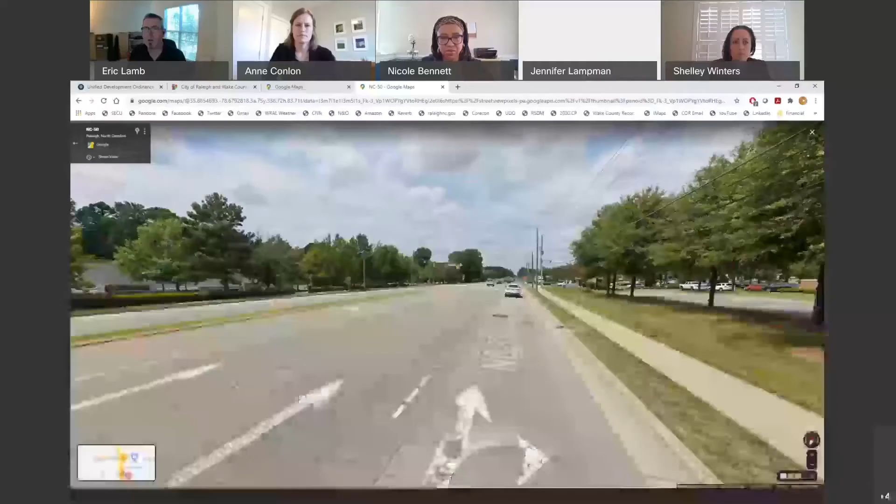Good deal. So we'll start with the Unified Development Ordinance, because that is really, from our standpoint, the basis from which all standards flow. And as we've developed this, when we look at modality, we're concerned with 4 primary things. 1 is vehicular flow for general purpose vehicles, 2 is pedestrians, 3 is bicycles, and 4 is transit.

I'm going to apologize. My canine assistant would like to come join the call, so we'll let her do that. Otherwise, she'll whine and distract. I may have another one that comes and joins me and is not as friendly. So,

we have all of our street sections outlined in the UDO, and in each you can see how different modes are incorporated into streets. So, I started here on the Avenue 4-lane divided, primarily because this is the most common, I think, that we see for major streets and development along major streets. And our standards for this, basically, a full 4-lane section, conventional bike lanes on the outside, a planted verge with street trees, and then sidewalks.

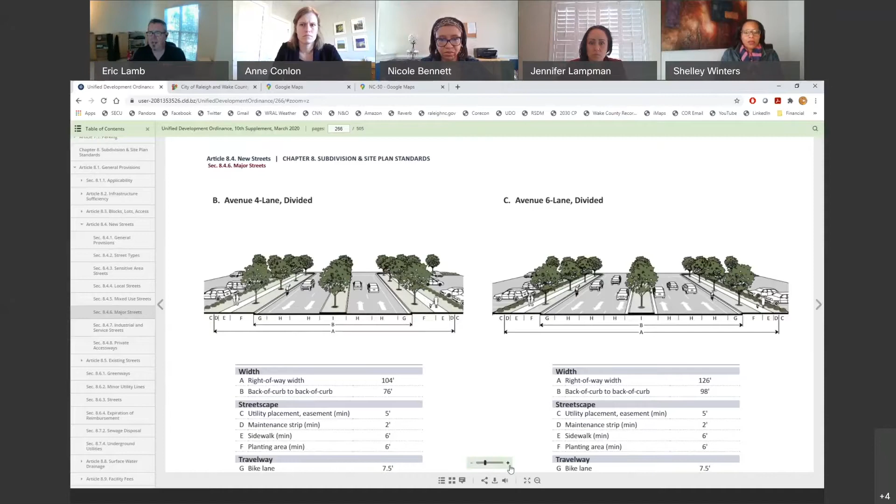And one of the things you may hear reference to, as we look at what this standard design looks like, we do sometimes run into issues with the North Carolina Department of Transportation. And it gets into this notion of what they refer to as clear zones. And NCDOT, for the most part, still utilizes an old school approach to clear zones and recovery, in many ways treating major roads almost like highways.

Our standards allow for the planting of street trees. We like that on multiple fronts, both from an aesthetic standpoint and the creation of a better space between the travel lanes and the pedestrian realm that make for a more enjoyable pedestrian space. But at the current time, we have to follow the state standards. We do have some latitude when there's bike lanes in place and certain types of trees are used, and we try and exercise that when we can.

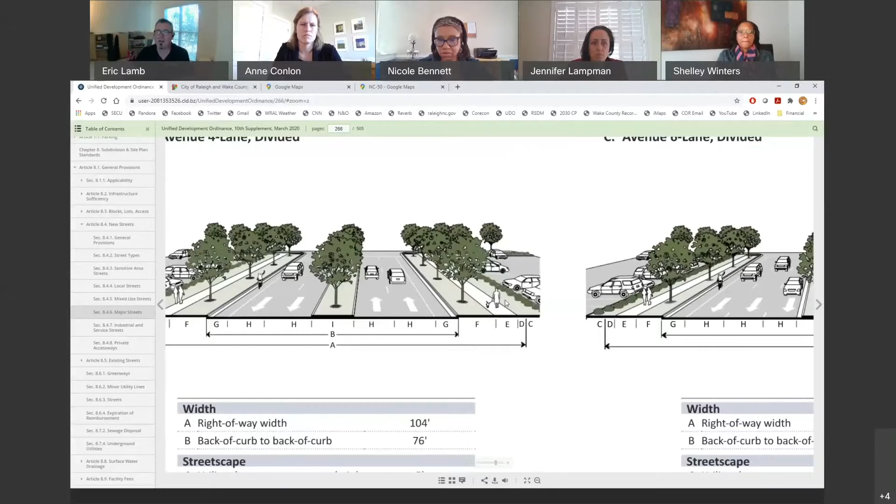But otherwise, DOT requires the street trees to be located behind the sidewalks in those cases, and we work that out on a case-by-case basis. But primarily, this is the fundamental starting point. There's different types of cross sections that we've got in the city code in the UDO.

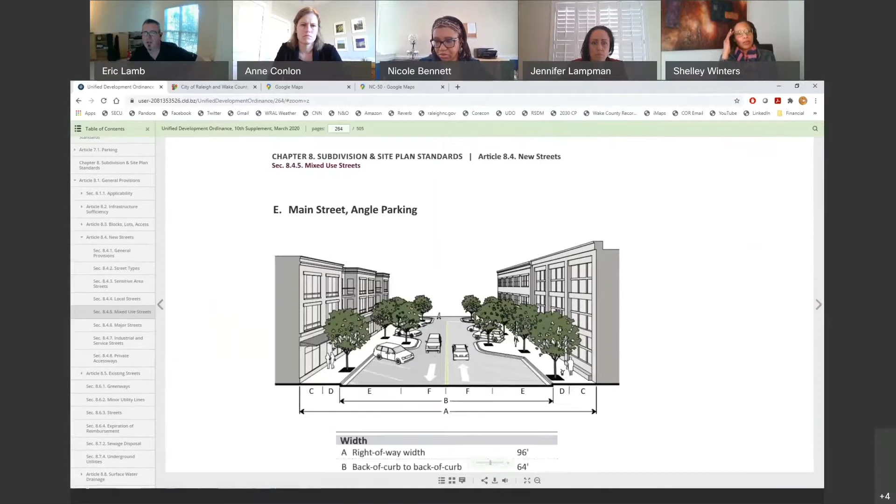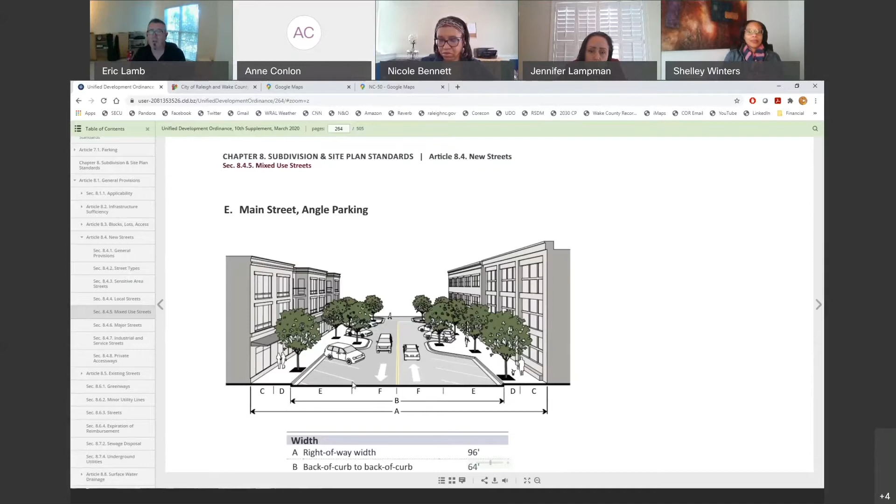In this case, for example, you'll notice with the main street that there is no specific bicycle infrastructure associated with this type of design. And the implication here is that a main street scenario is meant to be such a low speed, low volume environment with the interaction of the on-street parking that bicycles would move comfortably within that shared space with the cars. There's some debate on whether or not that is the right approach long term, but that's where we're at today currently with that standard.

We've got other standards for avenue 3-lane parallel parking. This is similar, for example, to what we're installing in the Cameron Village area. But we're starting to see now more migration based on newer design standards that would flip the location of the bike lane with the parked cars. Some folks like to call that a protected bike lane. Others call it a separated bike lane. But we're seeing that start to become of greater interest.

There's some trade-offs that go along with that. One of the upsides is that it makes for a narrower street footprint from edge to edge here, so that the friction of the on-street parking is happening closer to the travel lanes. And the thought there is that helps keep the speed on these streets down. One of the challenges is it puts the bikes over against the curb, and at intersections, you have to be careful to daylight those intersections, because otherwise the parked cars will hide cyclists from drivers on the main line, and that can create issues at intersections.

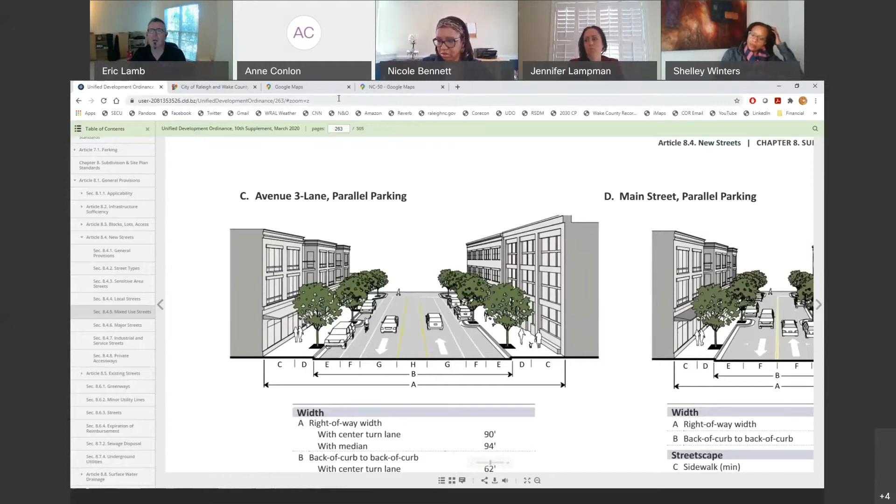So the bottom line here is that the UDO controls the standards for the nature of our frontage improvements, and how we apply those to development plans. So let me pause here for a second and go out. So I think one of the things that's most fundamental about what we do with development plans, let me find a good example. I apologize, you're going on a virtual tour of the city with me here.

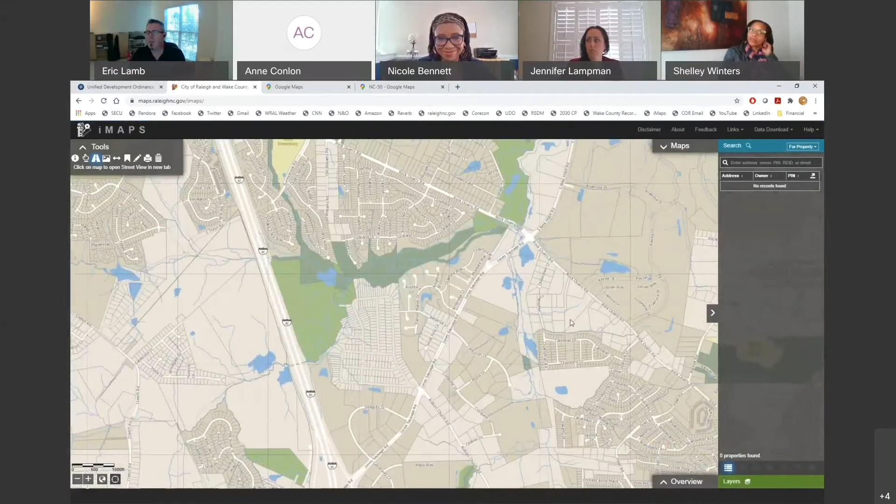So for example, as we have new development, we have the ability to require a couple different things. One is impacts to a site that are based on traffic impacts. So for example, you're generating the need for a new traffic signal, or you're generating the need for additional turn lanes. We have some ability to require developers to mitigate the nature of their impacts. The other thing that we have the ability to do is what are known as exactions. And that is where we can require, as part of the construction and development of a site, that the frontage is built out according to certain standards.

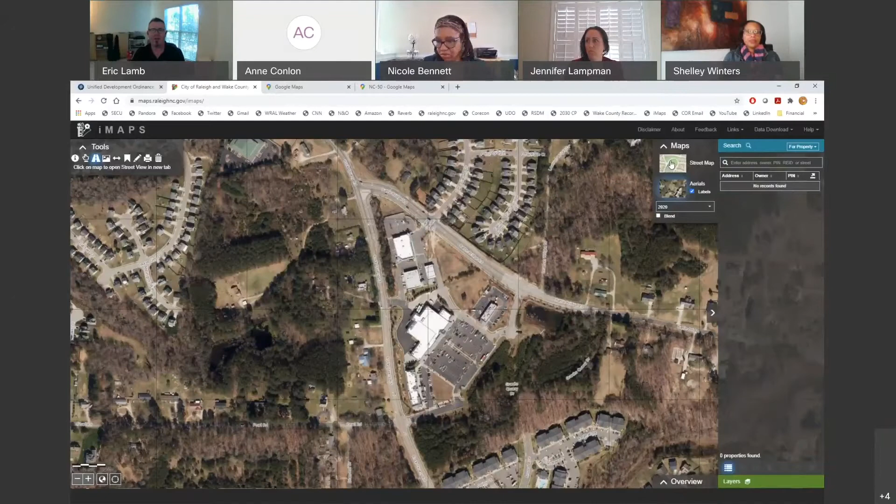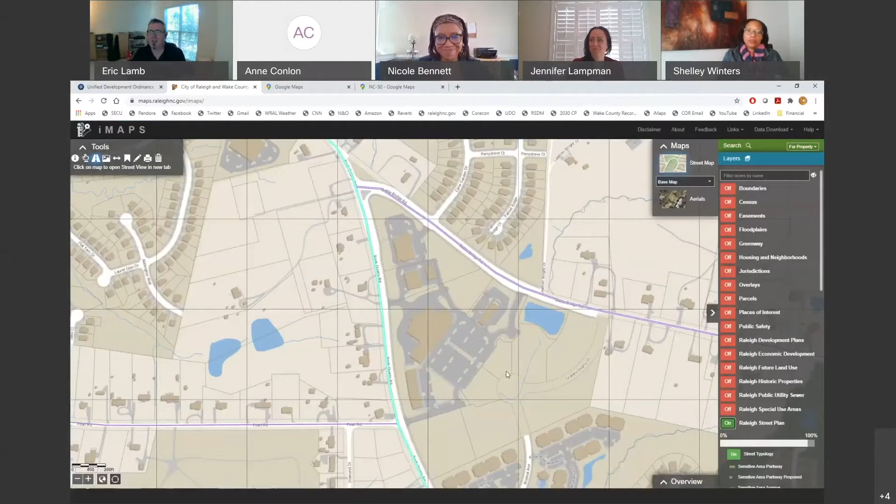Now, as I was showing you these cross sections before, we've got standards for each different type of classification. One thing that I'll point out is that we also have a street plan, and Raleigh is a fairly, I'll call it well planned city. Some may disagree, but it's very much a planned city in the regard that we've gone through the entire major street network and applied a classification and a standard for what each street needs to be based on the ultimate development of the city as proposed in the 2030 comprehensive plan. Because now it's 2021, 2030 is only 9 years away.

In reality, our forecasting, as we work with the regional metropolitan planning organizations, actually happens on more of a 30-year time frame. So looking at what the full build out and growth of not just Raleigh, but all of the member cities in the MPO would be, based on land use assumptions and what the yield would be and when that land develops. That gives us an idea to look at forecasts for what types of traffic volumes we could expect on some of these major corridors. And that starts to then inform us on how large these streets need to be. And so we've gone through and applied that to all the major streets in the city.

Everything that you see in the teal here are all classified as 4-lane divided avenues. There's a couple of categories. For example, if you see everything in the blue, those are designated as future 6-lane streets. The purple with a white stripe is a 2-lane divided, which could either be 2 travel lanes with a center median or 2 travel lanes with a center turn lane. It's effectively the same standard, and we apply that in specific contexts. And then the solid purple line is a 2-lane avenue, and that is 2 lanes of traffic with no separation between.

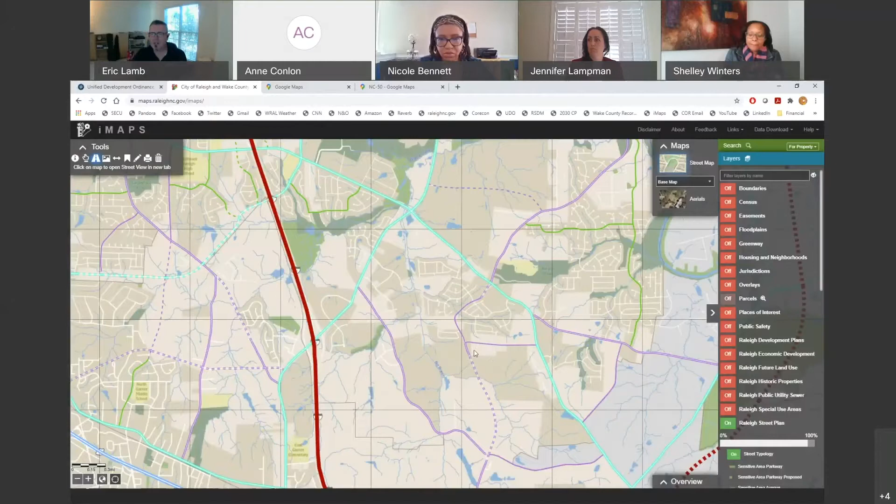And so as the site comes in to develop, one of the very first things that our development review staff does is consult the comp plan and see what is the classification of each street that these streets front along. And so this is a good example of a shopping center site that was done sort of on the edges of Southeast Raleigh. This is at the intersection of Rock Quarry Road and Battle Bridge Road.

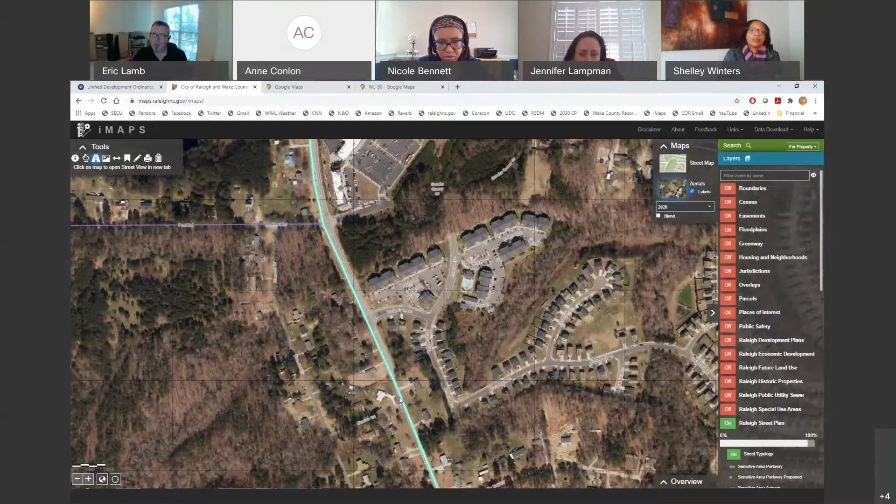So as this development came in, up until a previous point, this part of Rock Quarry Road was a 2-lane road. And so let's see if we can do this here and get a good view. And I'm going to back it up down here to this part. There we go. So as you can see, much of the area was developed originally as these 2-lane, farm to market roads. And that was the original backbone.

And in many cases, within the past 50 years, some of these streets haven't been paved roads that entire time. I can remember going to public meetings in North Raleigh and meeting people that talked about the fact that parts of Falls of Neuse Road were not paved in the 1970s, early 1970s, north of Millbrook Road. Some people can remember that.

But as we apply urban standards to urbanizing areas, that's why you see these areas with dead pavement where the road's been widened, the sidewalk's been built, but it's not being used for anything. Sometimes you'll see this space used as an interim turn lane, for example, and striped out. But in reality, we're requiring these developers to build out the entire cross-section of the street based on those adopted standards.

Now, in a case like this, that sort of looks like a bike lane, but we've not got it designated as one. But you can see how with the widening that's been done over here, again, the developer is required to build out per that cross-section along their frontage, and we're able to utilize that and create a center turn lane, improve some of the capacity and safety associated with a situation like this.

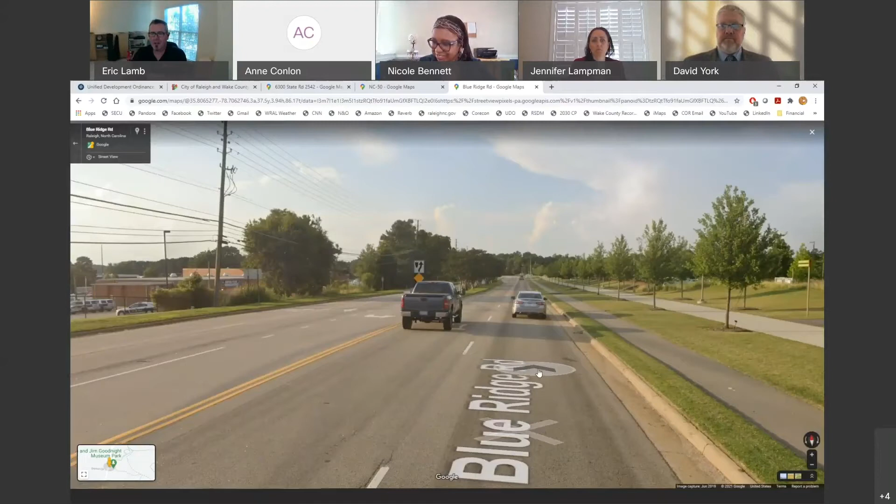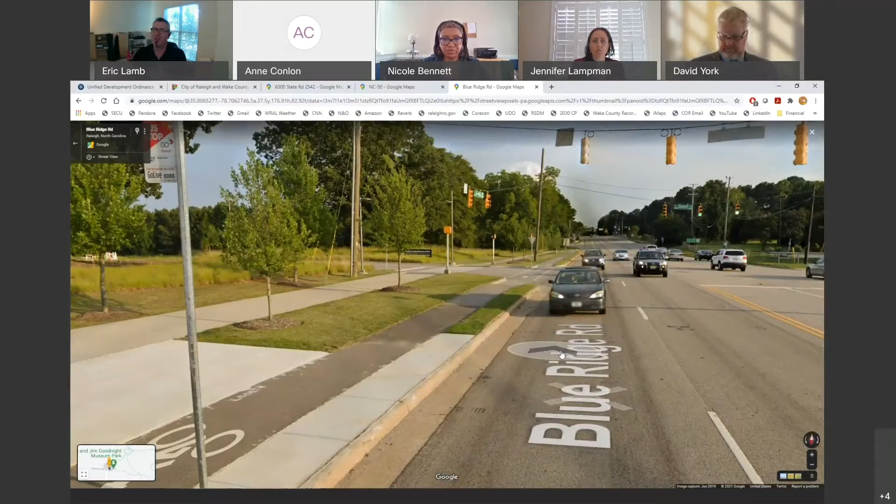Okay, so I guess the other issue has to do with that nature of off-site improvements and our ability to require developers to do that work off-site. What I was going to say was in situations where, let me find a good example. Let's pretend in this case this is a bike lane here, and we don't have that facility built behind the curb yet. There's some concern about, as we're exacting these frontage improvements from these developers, that we're not getting these back of curb facilities. And that's true on a single site basis.

The good news is we're still requiring developers to dedicate additional right of way. So at such time that we want to come back, we have the ability to move this curb line in and reset the curb line on the edge of the travel lane and build either a wider sidewalk or multi-use path behind the curb, or build a separated bike facility in this place. So that's the upside, is that we're still getting that dedication of public space that allows the city to come back at a later date and make that modification and make for a complete facility. One of the challenges sometimes is, stop sharing.

One of the challenges with our approach can be the piecemeal nature of those types of frontage improvements. You get a development here and they build all their section out. Then you got a gap that's still 2 lanes. Then developer here builds their section out. So you're still left with that in between section that either would get addressed with future private development or some type of public investment where the city comes in, or NCDOT, and finishes that widening. And that happens on a regular basis.

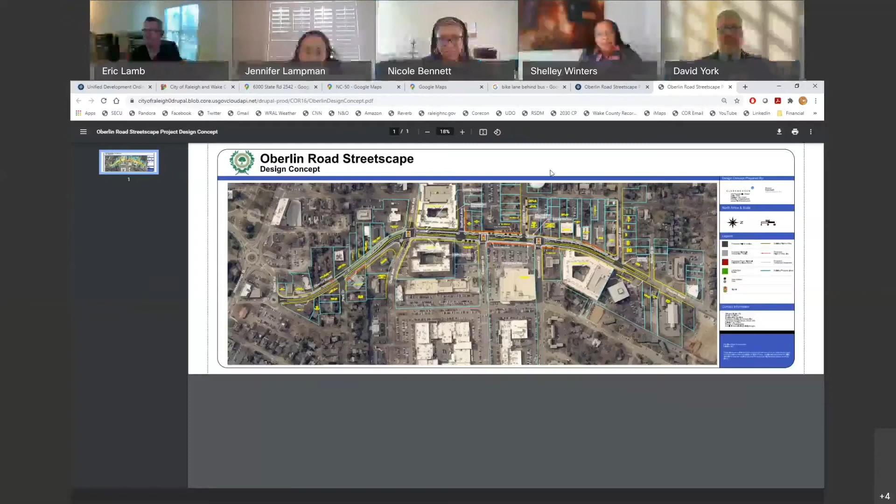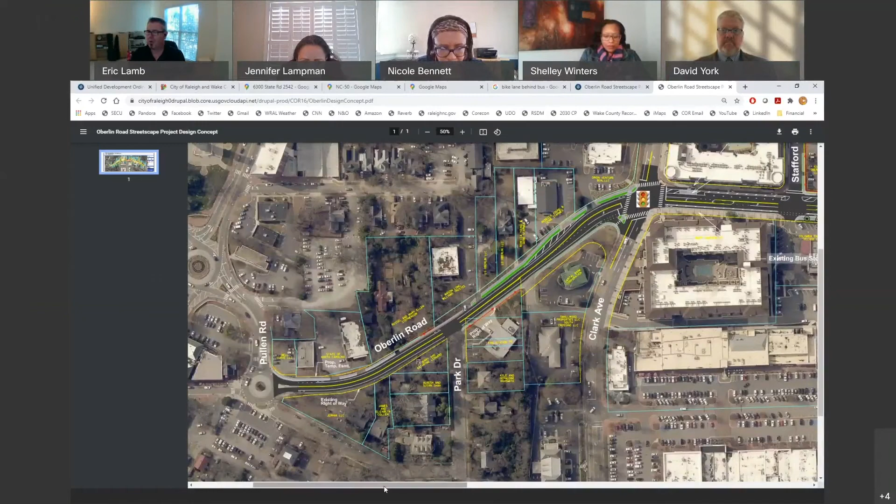So here are the current design schematics for the Oberlin Road Streetscape project, which runs from the Pullen Road roundabout and runs north of the Village District. So what you can see, this is a good example right here in this part of the project. So we'll have basically a floating bus stop, if that makes sense. So right now, if you can picture, Oberlin Road is currently a 5-lane road. So this falls colloquially in what was sometimes referred to as a road diet. We're going from 5 travel lanes down to 3 travel lanes.

And that's okay for several reasons. One, it matches the cross sections on either end of what's out there in the 3-lane sections now. And 2, the traffic volumes are commensurate with a 3-lane section today. But you can see here how the bus stop will be on an island out here. And then we're adding in bike lanes. You can see the buffered bike lane runs behind the bus stop. I believe there's a similar treatment further to this direction.

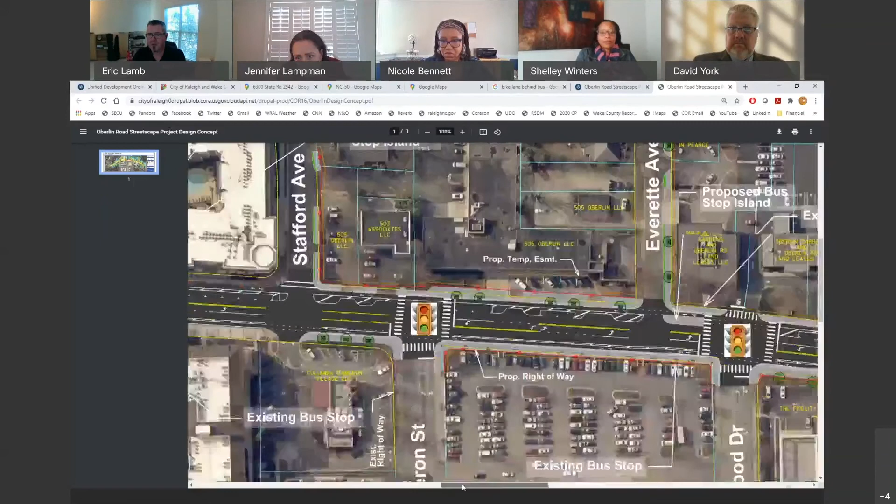One of the other things this is allowing us to do is to add in new on-street parking. And so that's a new benefit for the businesses that are out here, and again, creates what we were talking about with that separated bike lane behind the parked cars. So this will be the first parking protected bike lane in Raleigh. So yeah, there's a good example here. And this is a fairly urban context, but that's responding to the urbanization of this part of Oberlin Road. Any questions about this project, this layout?

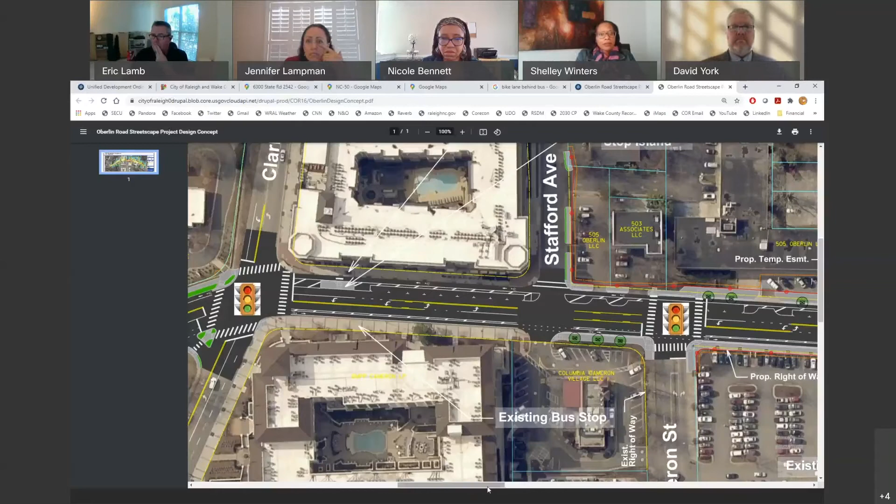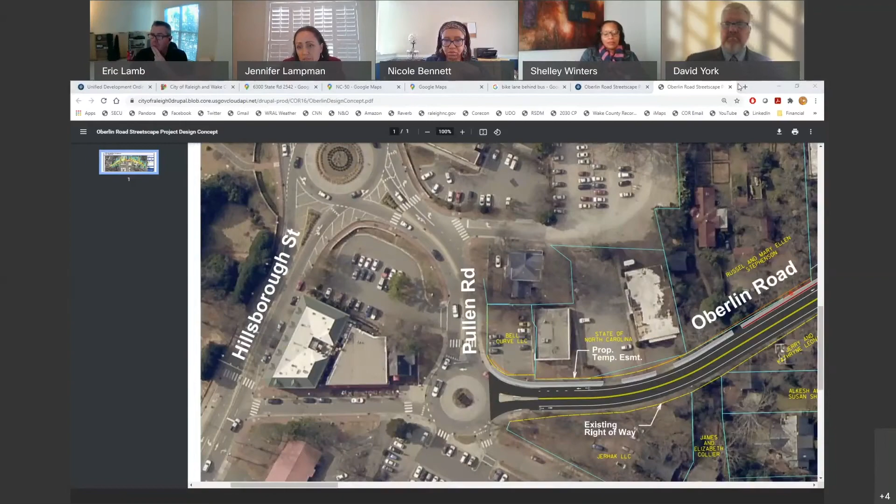Ms. Lampman, was that more on the lines of what you were thinking? Yeah, I have many, and in context of what you described earlier too, for example, we just approved a rezoning, I think, on that far corner where the circle is for Oberlin. And so, did our approval of that encompass future changes? And maybe I'm wrong. Maybe it's that island right by the Pullen Road, so maybe it's not on this one. But I guess the global question would be, when we get a zoning request, do you look at it from the standpoint, if someone is on Oberlin Road and you've got this plan, is that included in the presentation, down to how much frontage the city will need?

Okay, so that gets into a very specific conversation about when we have a development plan that's located along a street that's been slated for a capital improvement project, whether it's being done by the city or by NCDOT. And that requires a significant amount of coordination. I would point to the Smokey Hollow project as probably being the most complicated version of that we've done in recent memory, where NCDOT was replacing the bridges at Peace Street and at Wade Avenue along Capitol Boulevard, and reworking the interchanges. And we had done that in a way that we wanted to incentivize redevelopment and put in a better urban form with restoring some street grid over in that area.

And then we had development come into the picture with the Smokey Hollow multi-story project. So there's a lot of coordination in that case on what was the public project's responsibility and what was the developer's responsibility. Now, in that specific instance, the public project development was pretty far along at the time that the private development interest came in. And in that case, what's been approved as part of the public project is what sets the standard for that frontage.

And it's up to us to coordinate how the private developer fits. And we're talking about things like utility impacts and grading impacts and temporary traffic work zones and such. So that one was an extremely complicated example.